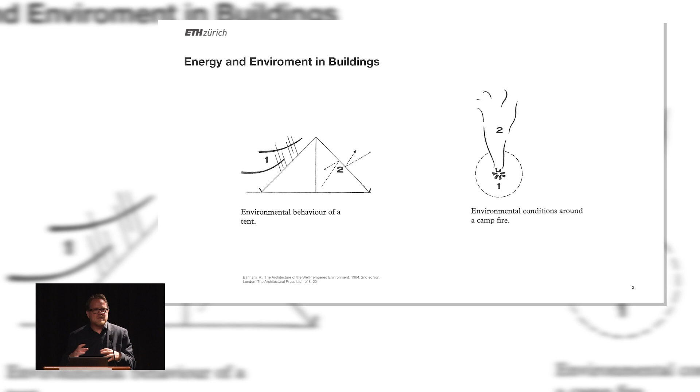Especially, and here comes the systemic aspect, we're interested in the interconnections. What does it do, how I build a building, how I need to provide it with energy, for example, how I need to climatize it. What does it do when people use a building in a certain way? When do I have to provide energy and mass, air, cold, to a building? And what does this do with energy and emissions?

As mentioned at the beginning, buildings as such are very interesting. They cover a wide range of scales, and we are really interested in investigating these different scales. So you could start almost from a materials level, a molecule, up to a mega city. You can start at choosing new materials, for example.

Those materials are embedded in components like a wall. This wall is built and used in a building and has impact on the building performance. And the building stands in a neighborhood, in a city. Whenever you change something on this chain, there are interactions between those different scales. And these for us are really interesting. We try to understand if we change certain things on one scale, what are the implications on a much larger scale?

We believe that these design processes have to be different. They have to be iterative and integrated. So you have to start collecting the different domains that are influencing a design. And of course, there are a lot of sectors that are interesting for construction and building.

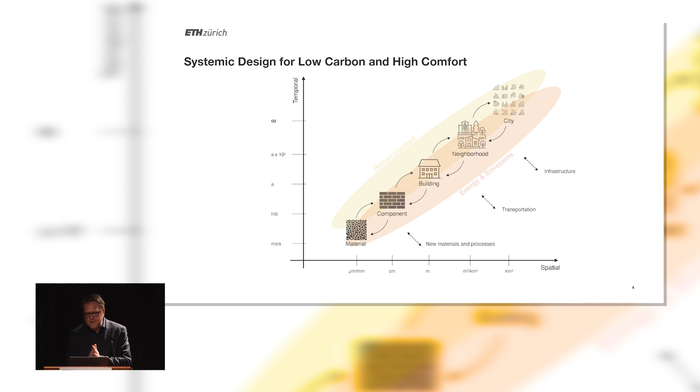So after this general introduction, I hope it was not too abstract, I'd like to show you two projects that we've been working on. One is a living lab which we have just opened a few months ago in Zurich.

It is the HiLo project. HiLo stands for High Performance, Low Emissions. It's a collaboration between different research chairs of our institute, starting with structural design and structural engineering, Philippe Block, my colleague, then us from architecture and building systems, so questions of energy and emissions, and digital building technologies, a chair of Benjamin Dillenburger that investigates digital fabrication techniques.

The idea of this entire living lab, at least from our perspective, has actually been spawned way back in Singapore. We were lucky that we were able to do a living lab as part of the Future Cities Lab 1 in 2016 to 2020. This is the United World College of Southeast Asia, which allowed us to build a living lab based on the research that we conducted. And this research was on a new cooling paradigm.

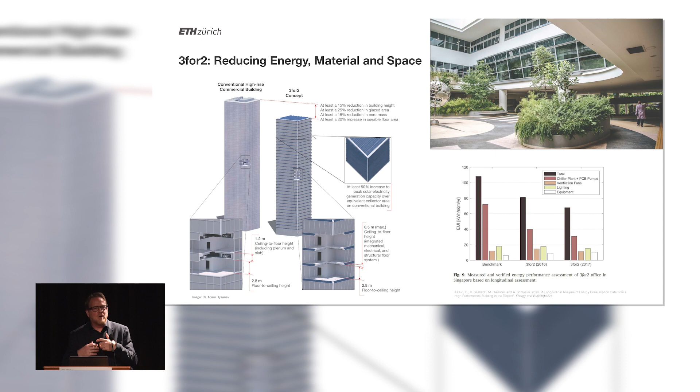Changing the cooling system means changing how you build the floor and the facade, and essentially you can harness those different benefits. We took this idea a little further in the NEST project, the HiLo project at NEST. I need to first explain a little bit what this is about.

We were really fortunate that we got asked to build a unit. It meant essentially over 6 years of collaboration between different research groups and industry partners to build this unit. And of course we were really lucky to get the top spot, so I always say we got the crown of this entire thing.

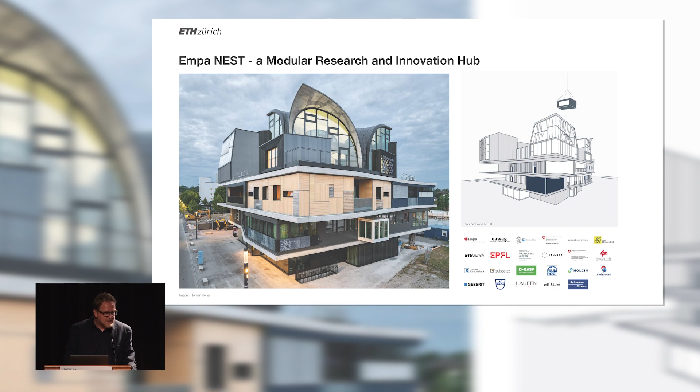And of course, that's this typical death valley of innovation, especially in construction, because construction is very risk averse and very conservative. The idea of the NEST project is to bridge this death valley, to provide a structure where innovations can be tested in the real, and then industry partners can pick it up and bring it to the market. That's essentially what we want—we want to develop things that have some impact. It's great, we like writing papers, and this is our main occupation, but at the end, of course, we want to have some impact.

This NEST also hides a second dimension, right? This is the stacking of those different units, and you could also see this as a stacked village or a stacked district. Imagine your village and the different elements of it, combined in this rack, with an infrastructure in the back that actually provides and acts as an energy supply.

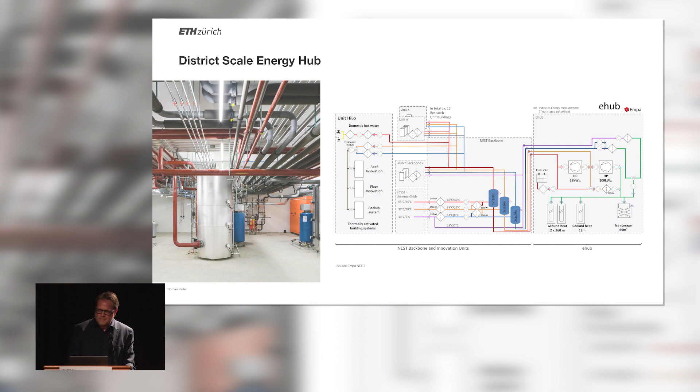We had this top unit, as mentioned, and you can already see it looks a little interesting, because different research topics have been combined. My colleague Philippe Block from Structural Engineering was testing structural innovations. The whole idea was to be lightweight, to use as little material as possible.

Then, of course, our challenge from an energy perspective was how do we actually integrate energy systems, and how does that become performing? As you know, this is a quite tough setting to start off with—it's a very lightweight shell with a lot of glazed areas. Immediately you can see there might be some challenges making this energy efficient, or as the client put it, it was supposed to be even a plus energy building.

The first is the roof shell. It looks a little interesting as a structure, and you might have seen this type of shell in history. The interesting idea is that you can span a certain area with very little material. If you optimize the structure, you don't need additional frames or pillars. This whole shell holds up by just 3 touchdown points where the shell is drawn to the base level, allowing us to span the entire area.

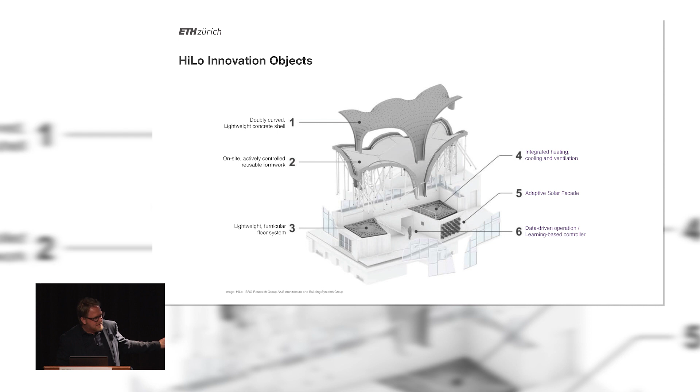The main innovation here was developing a flexible formwork that would allow this shell to be built and then reused. The second innovation is those floor systems, which I'll zoom into a little more later. Numbers 3 and 4, those floor systems follow a different structural principle.

You've probably seen Gothic cathedrals and their domes, where all the forces are basically in compression only, using a very elegant and refined structural system that works only on compression. If you do this in a very refined way, which they did, you get quite some benefits in material usage and lightweightness.

Numbers 4, 5, and 6 are the questions we brought in. If we have a lightweight floor system, how can we integrate heating, cooling, and ventilation? Remember back at the 3for2, this was our main question.

Then we had a question: how can we develop facades in a totally different way? How can we find a more responsive way of managing solar radiation? Number 6 addresses the operation side—we'd like to move away from the very basic way of controlling buildings towards new mechanisms, for example learning-based controllers that allow the building to learn how it's used and how it performs best.

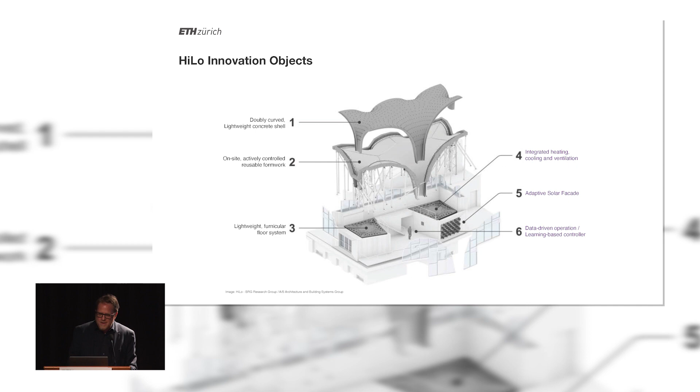So I'll first give you some impressions of how this looks. You can see it's quite a unique space. This is the shell from the inside, and you can see the points where the formwork was attached and how it spans across. It's also interesting that it has a quite high glazing factor.

One aspect of our research was different means of shading and solar protection. What you see here is all electrochromic glazing—glazing that can switch between fully transparent and almost opaque. It's not too new, and it's supplied by one industry partner, and it's very interesting for us to test the capabilities of such a system.

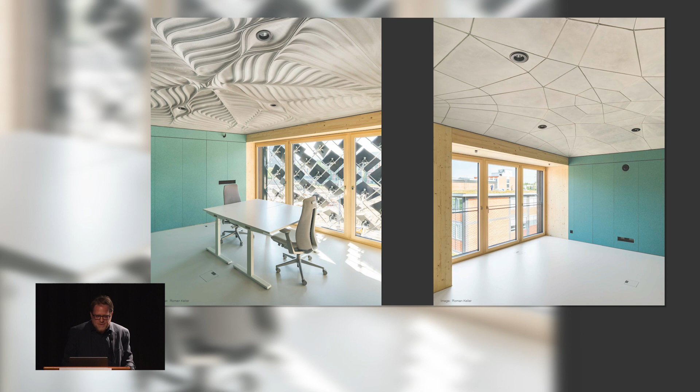These are the 2 offices. As you can see, those 2 little boxes had a kind of office environment, and to the left you can see the ceiling is this floor system I've been talking about—I'll show a bit more detail. To the right you see a second iteration of this floor system, and to the left you can also see the solar facade, which I'll share a bit about.

The point here is that this doesn't necessarily look like a technical installation. There are opportunities in design—new ideas on design—and you can still merge that with excellent design at the end. Whether this is excellent or not, I leave up to you, but certainly you can design differently.

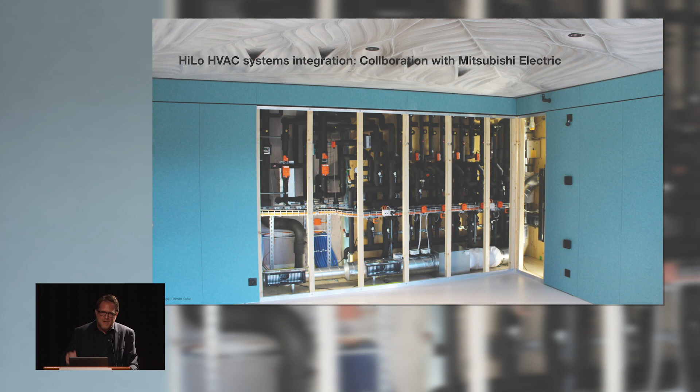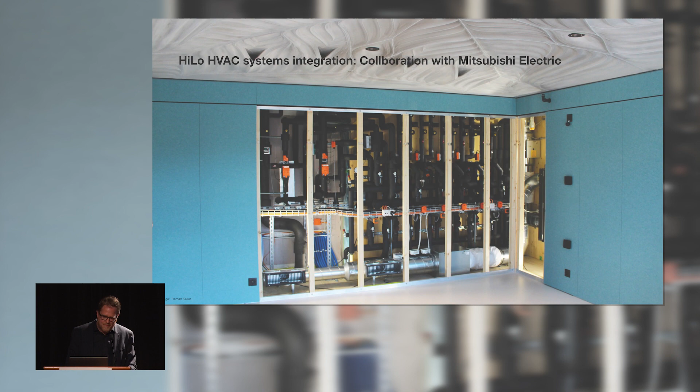Then last but not least, this was the so-called backbone, where we connected to this vertical district, as mentioned, getting all the necessary energy at certain qualities, different temperatures for example. On top you can also see the air outlets of the ventilation system embedded in the ceiling itself. So this is the result, and I'll show a bit of the process, how this worked, and how these different interactions and systemic aspects came in.

We built a prototype. We were invited to display a prototype at the World Economic Forum, and we thought that was a great chance to actually build something live and test it for the very first time. We made a little video, which I'll show—I hope you can see it and I hope it works.

That basically illustrates the collaborative process of how such a floor system is created. This still looks a little different and uses a slightly different mechanism, but the process is replicable.

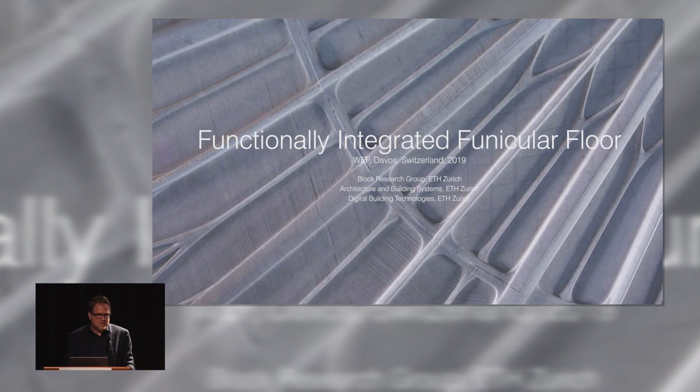We also wanted to make a point that if you use digital fabrication, of course, you have a lot of flexibility in how you design. So this, of course, is very intricate, but it doesn't make a difference if this is just a flat portion or if this is as intricate as this, because essentially for the production process it doesn't make any difference. It shows that these types of processes also bear new options for design.

So this is the process.

For this initial prototype, I would quickly show the different domains in between. So this was from our colleagues from the structural design for the final floor system that we actually built in the HiLo, and you can see here that the structural optimization focuses on using as little material as possible.

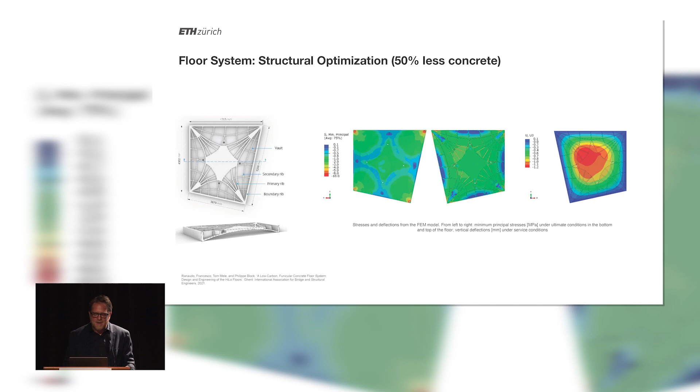They were able to achieve a 50% reduction in concrete at the same carrying capacity by using this approach, as mentioned, like a Gothic cathedral, mainly on compression, no reinforcement necessary, and then doing a structural design that really defines how thick those ribs need to be and what the dimensions of this entire floor should be. So this is the structural part, the embodied emissions part, you could say.

Then we, from the systems, building systems side, of course, we're interested in how can we utilize this shell to actually climatize the space. Remember this idea from 3for2 where we said, okay, well, we get rid of all these plenums and we integrate directly. What can we actually save as space?

And in 3for2 we were able to save 70 centimeters. And here the aim was, okay, let's do a fully functional floor within 25 centimeters.

So again, using the digital model, we were able to integrate those heating and cooling systems and basically combine them with the structural system so they don't hamper and they don't hurt each other, so to say.

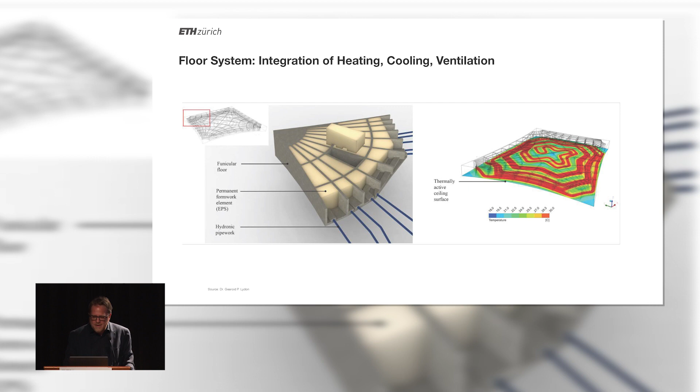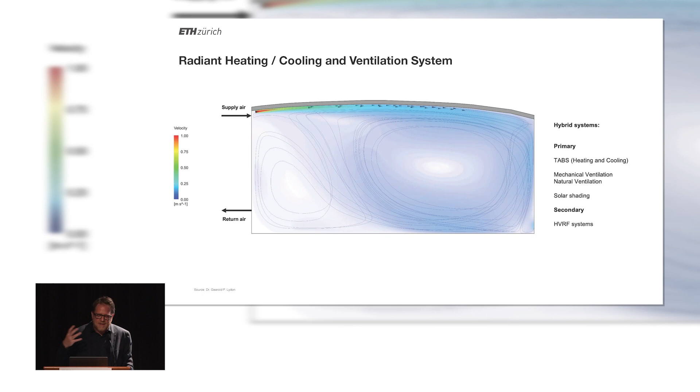And using that, we of course brought this further into how the entire system would work. So you can see here, this is the bottom layer of this floor system. And now if you integrate the ventilation system here, you can actually utilize this shell also for additional heat transfer. So the air gets ejected into the space, takes up heat or loses heat to the floor system, and then gets mixed into the space. So it acts as a very efficient ventilation system.

And then last but not least, for this iteration, we tried to do things a little bit differently, not in the sense that it's only aesthetic and visual, but how could we even enhance this lower surface level to be more effective. And to the left again, you can see a simulation of how this air is brought into the space. And now again, with digital fabrication, we were able to sculpt and design the bottom of this floor system in a way that air distributes and takes up heat especially well and mixes in an even better way.

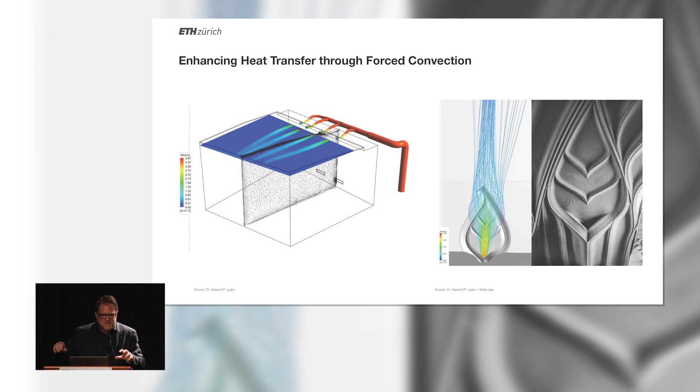So the idea was, if we blow the air underneath the surface and we design the surface in a way that it spreads the air as good as possible, we can be even more efficient.

So you do all this thing, and this is great, but at some point you also have to build it. And here you can see how this formwork looked like. The main slab came in 3 pieces, basically. This is a formwork, and you see from the bottom those hydronic loops, essentially where the water is used for heating and cooling. And you see the formwork, the blocks that build those concrete ribs.

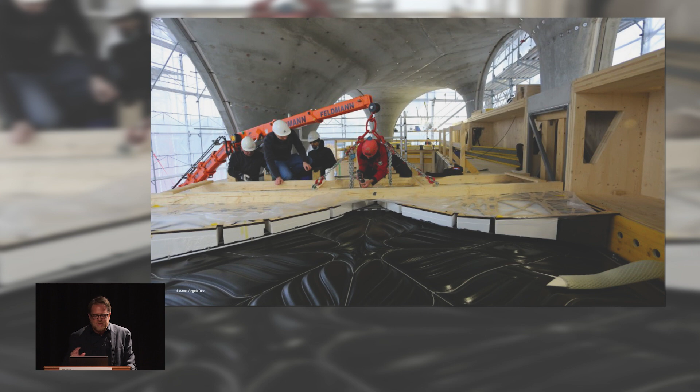And in this image, you see all things combined. You see the bottom layer, which is the formwork, which has been digitally fabricated. You see the foam blocks that act as a lost formwork and an insulation. You can see those white lines, which are the hydronic pipes, and to the right you see those ventilation inlets that are directly embedded into the formwork.

So we've built those two different floors for the HiLo project, and building a thing is one thing, but of course as researchers we're interested in how well does that perform. And what we're currently doing, what is ongoing, is testing of performance. So does the effect really make a difference?

The first testing in the heating case confirms that if you see the bottom layer and the top layer, the bottom layer is just utilizing this hydronic loop, routing through hot water to heat up the ceiling for radiant heating. The top layer is adding air circulation and ventilation. We can see that the air actually helps to spread the heat across the floor and helps to level out the temperatures. You can see this also in the graphs where you see those two peaks - a very uneven heat distribution in the bottom system, versus on top when we use both the hydronics as well as the air-based system, we have a very even temperature distribution.

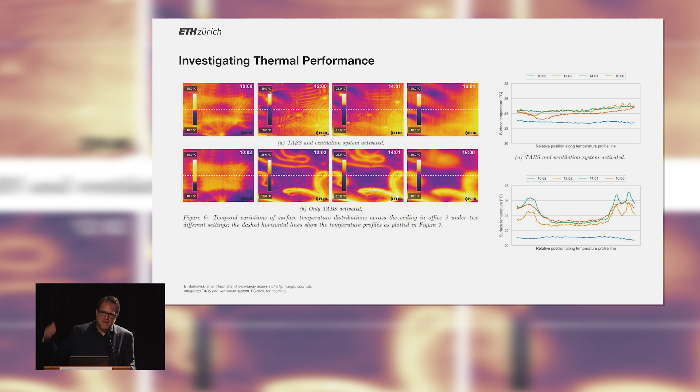What does that mean at the end? It means higher comfort. It means that people within this space don't have different temperatures. This idea of radiant systems is maybe not so common in Singapore, even though we tried it. The base idea is that the heat is not transferred using air, but it's transferred using radiation. In our context, that's a very common system to do that.

So there were some ideas that this might work, but what is even more interesting, and this is currently ongoing, is of course the question: do people actually feel a difference from these type of systems? What happens if we use a conventional air conditioning system versus this radiant system that we've designed? Would people feel different? Would they perform different?

So we just concluded a study with 16 participants that wore wearables, for example, monitoring heart rate and skin temperatures, as well as room sensors, as you can see here in the center. And basically now we're waiting for the analysis of the data to find out, does it really make a difference for us? Do we feel different? Do we perform different? And is this something we can utilize?

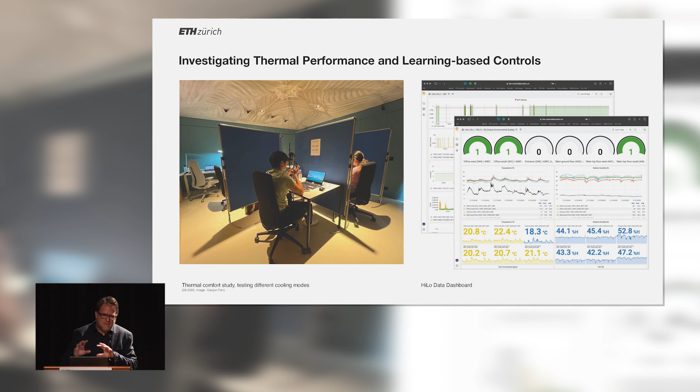Backbone of this, just a side note, is the data acquisition system. We have roughly 1,500 sensor points that allow us to have a very precise image of what is actually ongoing on state and flows.

So a second project within this HiLo project, again, that has this idea of systemic connection, is the adaptive solar facade. The idea here is pretty simple, right? We build facades actually not much different than we built them 200 years ago. We either have an opaque facade or we have a transparent facade. At some point, of course, our glass technology becomes more refined, but essentially our facade doesn't really respond to what is happening to the outside of a building or to the inside of a building.

So when we use a building, occupation changes, right? We work, we have a meeting, we have things inside that are different. Also outside, not so much in Singapore, but in Zurich and moderate climates, we have changing seasons, the sun has totally different angles, we have very rainy periods. So the facade as an interface should actually be something much, much better in communicating between those two environments. And this was the mindset, how we thought about the facade from the very beginning.

And you can see this by this visualization. The facade is actually really interesting because it's the space of a building with the most conflict, because you actually always want different things, right?

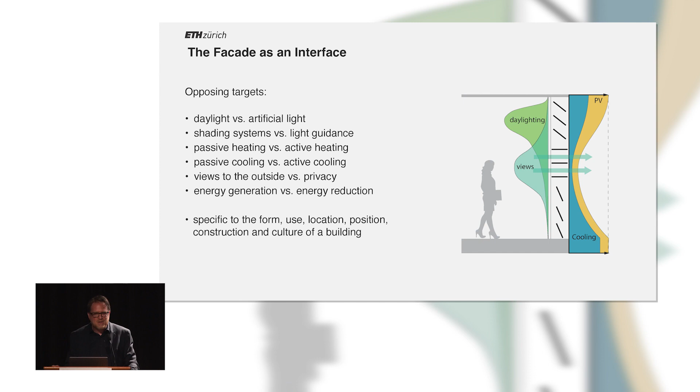You like to have daylight, but you don't want to have too much heat. You want daylight also to reduce artificial light. You want to have shade, but then you need some kind of light guidance. In our climate, we have solar energy we can use for heating, but we don't want overheating. So there's always this kind of opposing goals at the end. The idea of this facade was to come up with a system flexible enough to better manage these solar radiation questions. It's been a very interesting project.

If no one is in the space, it's actually solar tracking, so it produces as much energy as possible. If people are in the space, it responds to personal preferences and requirements—people who like a high degree of shading versus a high degree of outlook can control the facade accordingly. The idea, at the end, is that this facade eventually learns how people like to use the space and what their preferences are.

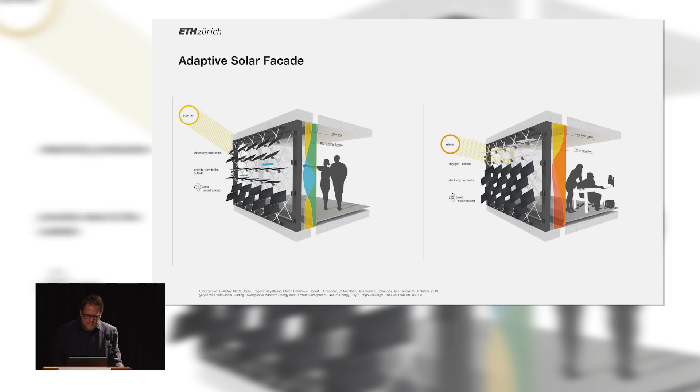This is the concept in a nutshell. As you can see, there are 40 modules that each have their own actuation mechanism. Of course, this is taking it to the max—you would never build such a facade in reality because of the high effort involved, you'd think. But the interesting part is that this is a research project where we try to maximize the abilities of such a facade, so you can control rows, control clusters.

You can let certain modules focus on solar energy generation versus reducing the heat load. The systemic aspect is very interesting because the facade has a lot to do with the space behind it. For example, if the building's heat and cold generation system behind is very inefficient, it's better for the facade to reduce heating and cooling loads than to focus on solar energy generation. Conversely, if you have a very efficient building system behind, the solar facade does best by maximizing solar energy generation. So the system actually expands from the facade to the entire space behind.

And again, the second level of different design domains comes into play. We design for energy—this is what you see here to the right—the question of how this needs to be configured to produce as much energy as possible while reducing energy use as much as possible. But also questions of structural design come in: how do I need to dimension this entire system to withstand wind loads, to hold up in harsh conditions and higher winds, for example.

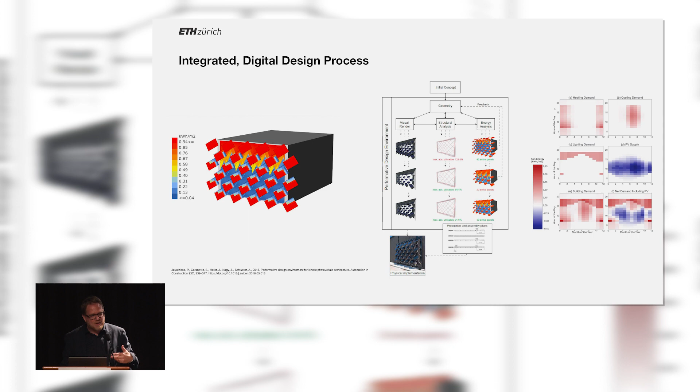One part of the PhD—one of our PhD students was developing a digital design framework that would allow negotiation between structural components, energy performance, and visual, architectural, and aesthetic components. This is what we mean by systemic design: bringing together different domains to arrive at a better solution in the end. This is one of our students holding the structural system—by lightweight, we really mean lightweight. You can hold up the entire carrying structure with one person.

And this is not only the structure, it also routes the electricity and the pressured air that is needed to move those actuators. And maybe you've asked yourself, okay, how does this thing even move? That's a very valid question, because that was at the core of the entire project.

So what we've developed over quite some phases of research is a little piece of silicone. It basically has pockets, and if you inflate those pockets, it results in a two-axis movement of the solar panel. So it's like a little solar tracker made from rubber, and we got there by fiddling around with new materials and new production techniques, to be able to create a piece of rubber that just by changing the air pressures moves a solar panel in two axes. And to the right, you can see how this whole thing is constructed.

You have this little rubber actuator, and this sits on this lightweight rod net and is able to move accordingly. And that's, of course, one of the harsh conditions on the facade - you know this in Singapore really well. Everything that is exposed to the outside is quite in demand and quite challenged, and you need to find things that are robust and reliable. But you of course need to invent things that at the end are better performing than existing solutions.

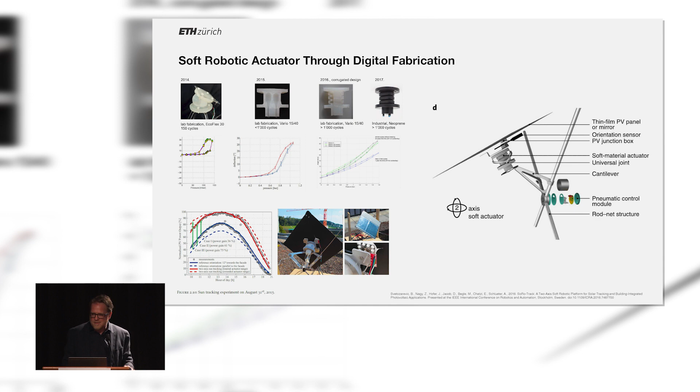And of course, this is all nice - you can do that, and it looks very technical and all these things. But the question essentially is, does it perform better than existing solutions? So we had a master's student working 6 months on the full life cycle analysis of this system, down to the level of the individual screw. We could do this because we built the system now 5 times, as a full-scale prototype, so we know exactly which components we used. And then we started to compare.

It becomes really interesting that it depends very much on the context if this facade performs better than a conventional solution or not. So for example, in a place where the electricity grid has a medium emission situation, like Zurich, you can see that the facade, the second line from the left, performs better than all the other solutions by a few percent, maybe 10, 15, 20%. That's already good news for us because it's generating electricity, it is providing better shading and heat protection, and it has more material than a conventional solution, though not so much more. The conventional solution is just a glazed window, or a window with static photovoltaics and a conventional shading system - we compare against those two things.

What is interesting, in the middle, you can almost see this is the future - this is Oslo. Oslo has an almost decarbonized grid. If you have an almost decarbonized grid, you don't get a lot of benefits from producing solar electricity, which means that the material efforts you have to take, all the material and the embodied emissions, play much more into the equation. There you can see in an Oslo situation, it would be better to just use electricity from the grid than to build an adaptive solar facade. And that's a little bit our future - what we're currently doing is a race against decarbonization of the grid. Grid emissions are going down, and you can ask, if the grid is fully decarbonized, do we even need solar anymore?

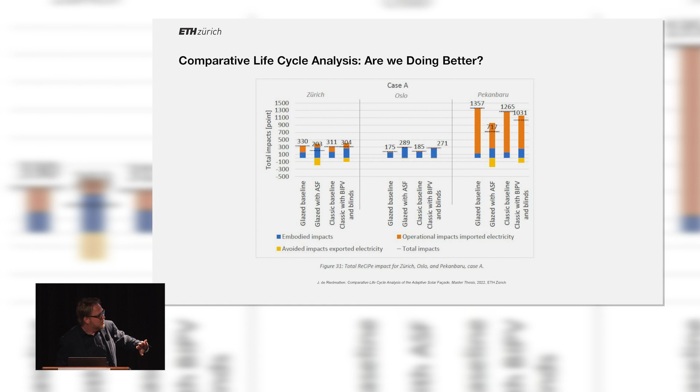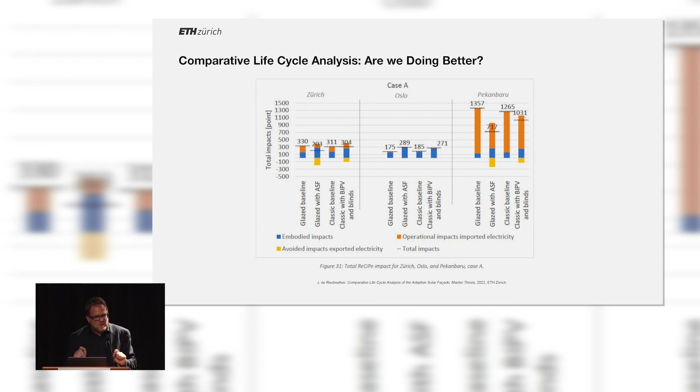We'll see. To the right, you can see the same situation in Indonesia, which is interesting because of a different climate - much more cooling required, so it's more effective - but also because the grid emissions are very different. The grid has much higher carbon content, and every kilowatt hour you reduce by such a facade counts. So in the context of high emissions, which can be any place, not just Indonesia, it could also be Europe, you would see the same - such a facade performs much better than a conventional solution. The interesting learning here is that it's always dependent on the context where you apply these types of technologies. We thought this was an interesting example, and we built this for the sake of research and for testing that.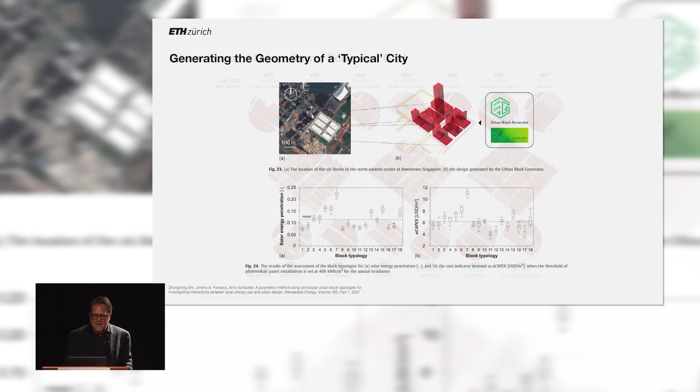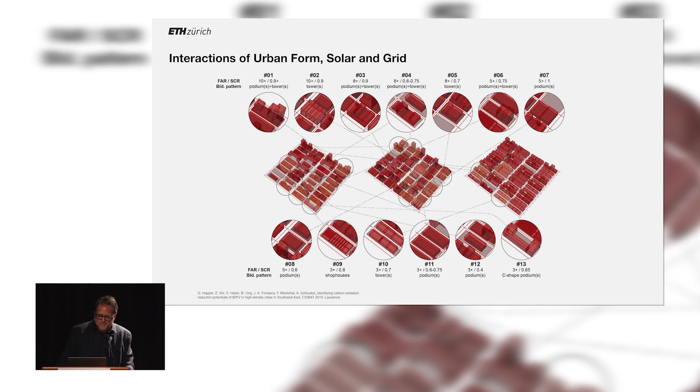And with this, you can really start thinking, okay, and analyzing which areas of those blocks could I supply and provide with solar electricity, so solar modules, to achieve a better footprint than if I would take the electricity from the grid.

And this is then basically what we did. So you can analyze, you can assume a certain threshold of radiation, and at this threshold of radiation, you can...

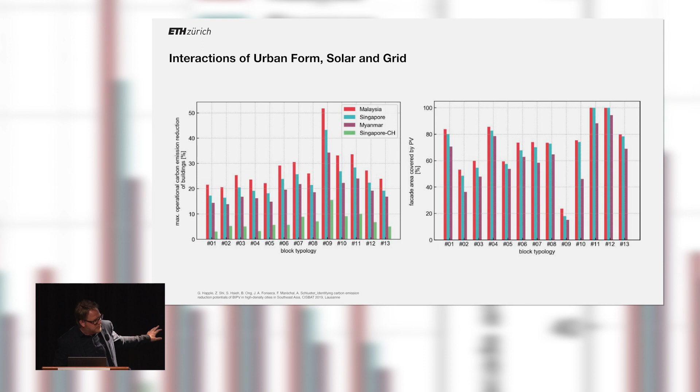produce electricity with a lower carbon footprint than if you would take the same electricity from the grid. And it's quite interesting how much you can actually reduce, and you see those different block typologies perform very differently dependent on where you are. So if you take the electricity grid from Malaysia, Singapore, Myanmar, or Switzerland, the fraction of carbon emissions you can save varies. Obviously the more carbon heavy a grid is, the more you can save, but it shows that depending on the different block typologies, you can actually have a large impact on carbon emission savings.

Block typology number 9 sticks out. That's not so surprising, since number 9 is basically a shop house typology. And of course, a small volume with a large roof area has a very nice fraction between energy consumption and potential energy production.

But there's also other block typologies that perform rather well. A significant share, you could say 20–25% of building energy demand, you can provide with solar. And the interesting part is, what is the area that would need to be covered to do so? You can see that, dependent again on the location, it's rather a high fraction of the facade, not the roof, that would be covered in photovoltaics.

And bear in mind, you would still be better off than if you take electricity from the grid over a life cycle perspective. So the kilowatt hour produced by a solar module still requires less carbon than if you buy this kilowatt hour from the grid. So that shows, even despite our conception that Singapore benefits the most from solar on rooftops because the sun is very vertical, there's still a significant impact you can have by facade-mounted solar PV, for example.

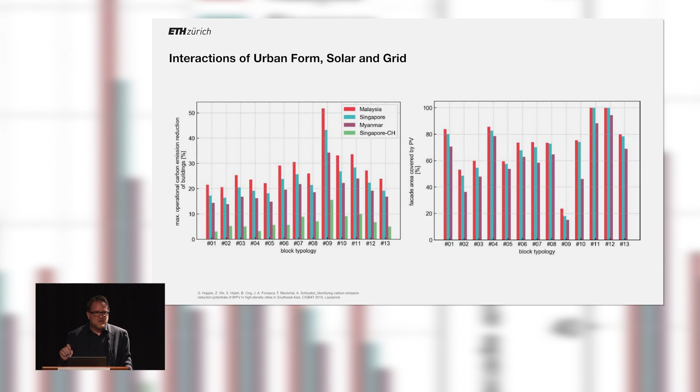And then, of course, that gives the urban designers some implications of what they can do, and gives them information on which block typologies might be most suitable and best performing, assuming there's a carbon emission reduction goal. Let's assume a city wants to reduce the carbon emissions of one area by X%. If you don't build your buildings in a way that you're even capable, you don't achieve those goals. So if you build the city without minding that, you're not even coming close to your original goal. And this is the type of interaction that is interesting for us.

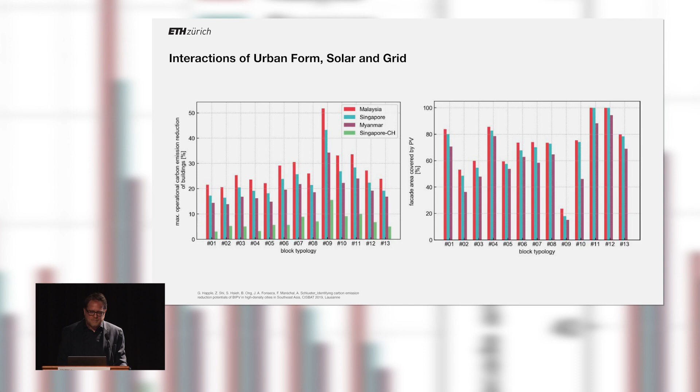Now there's a second problem. How should I know how a city is actually used? How do we use a city? How will the city be used? Because essentially all the energy is spent for the people using these buildings. So how should I predict how it could be used?

So for those of you in the building domain who do building simulations, you know very well how this works. You take what is called a schedule. You can see the classical schedule, for example from ASHRAE, the American Standards Organization, that says, well, at 12 o'clock on this weekday, there is approximately 0.87% of the people in this building of the total occupancy load.

And of course, that's very schematic, and what we did, we tried to better understand how this future city would actually be used. Now, what can help us is quite obvious.

We all spread a lot of data. You can see here those little devices, they check into every location you're actually at. And you know this well because most of you, as well as me, are heavy users of Popular Times, for example, from Google, where you see, is it full right now? Should I be going tomorrow? Is it full right now?

And what we did is basically harness this data from Google Popular Times to understand how people actually use certain locations in the city. So you can say this restaurant, for example, or this office is used in this way as compared to a restaurant at a different place. And of course, the speculation is that there's large differences in how we actually use a city. And this is then what we can actually see, and you can see this again in the schedule.

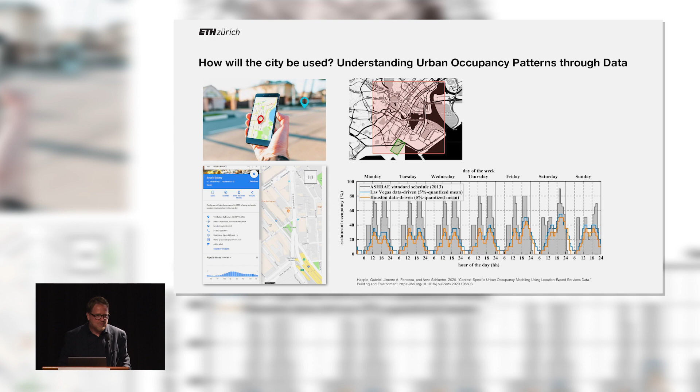This is what we did for a certain area representative of this new city. You can take, for example, a downtown area, analyze all the different restaurants, take the data from all of them, and then make an assumption about how future restaurants would be used.

That's why we do this exercise. The number of occupancy tells us how many people actually do which activity in a city, and from this activity we can understand how much energy they would need and when they would need it.

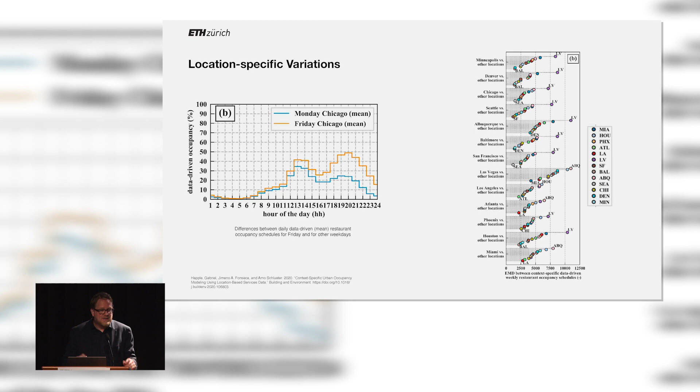So let me wrap up with the question of how this comes to impact. These methods are great, we do this in research, but how can this gain traction? Since FCL2, we started developing a modeling platform called the City Energy Analyst, which fuses all the research into this modeling platform.

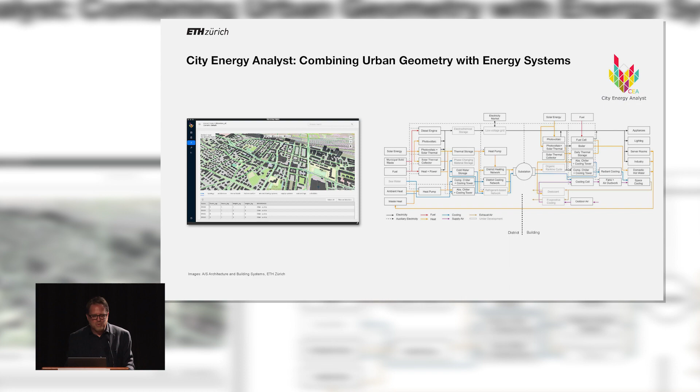To the left is the modeling interface. You can go to any place on this earth, use OpenStreetMap to get the base data - for example, the base data underlying the buildings. You choose a location, get the data, and then enrich and augment it with your own information. Then you can assess how much energy is consumed, how much could be produced, and ultimately take better informed decisions.

Of course, we use that a lot in teaching. This fall we are doing a new class on this. This was actually a course we did at the Future Cities Lab, where we explored this type of toolset with government agencies, researchers, and students.

That helped us a lot understand how people would actually use such a tool. Since then, we've made it open source, and we try to incentivize who would use it. From the latest downloads, roughly 1,100 people have downloaded it - that's great - in 63 countries. A lot of people are starting projects with these toolsets. These are examples from people we reached out to: Lisbon, Amsterdam, Vancouver, and of course Singapore - the Cooling Singapore project is using the tool.

This shows that people are starting to use these types of analytics when thinking about redefining and redesigning the city, incorporating energy and emissions into that. That's essentially our goal - to do something that has impact and actually changes how we build and design.

And with this, I'm coming to the end.